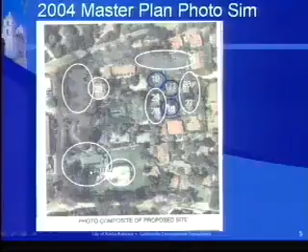And then we have a photo simulation of what the project would look like if the applicant went forward with the complete 2004 master plan. Of course, this is a photo simulation. This was an enlarged parking area to look like this, enlarged here in the northwest corner. These blue ones, again, are the historic buildings that have actually been moved, relocated from here over to this area. And then the 5 new buildings that were approved: 28, 27, 26, 25, and 29. And then the main building, some changes were approved there, and as well to the pool.

As you know, this is a 6.7 acre site. It consists of 29 buildings. And since the 2004 master plan, some changes were made. Basically this is what consists of those changes.

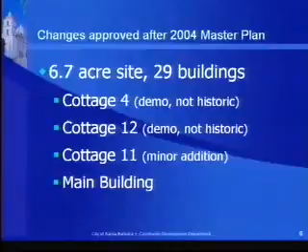Cottage 4 was requested to be demolished because there were structural problems. It was not one of the historic buildings, and it went through the process of HLC review and a historic structures report, and that was approved. Same with Cottage 12, which was allowed to be demolished and reconstructed, and also not a historic building. Cottage 11 was allowed to have a minor addition in the back due to some structural problems, and that was approved. And then some other changes to the main building that I'll go through.

In regard to the main building, the 2004 master plan included a new entry, new loading dock area, raising the lower level of the dining deck, and an expansion of the hotel consisting of 2,251 square feet, which would include a new spa, fitness center, and administrative offices within that square footage.

The applicant presented information regarding the structural problems associated with the main building when they began looking at making those changes. They requested a demolition permit and went forward doing that.

Some of the changes as a result of the new building being constructed are listed here. There was an increase in the basement size of 953 square feet, an increase in height of 2 feet. There's also some concern that the main building was increased in height by maybe 8 feet.

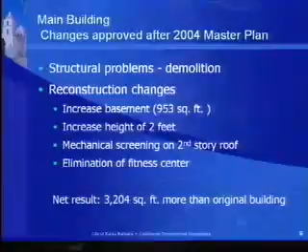I think what people may be looking at is that there's some mechanical screening that was approved on the second story roof, and that does extend the second story. I'm not sure how many feet exactly, but to screen that mechanical equipment. And then also the elimination of the fitness center that was approved on the first floor of the main building.

The net result is that there are 3,204 square feet in the main building, more than were in the original building.

Now getting to the revised master plan, it basically consists of 5 components: the northwest corner, the northeast corner, cottages 27 and 28, the swimming pool and fitness center, and then a small portion by the entry and service area of the main building.

The approval consisted of the relocation of those historic cottages and the construction of a new surface valet parking lot consisting of 52 spaces. Today's proposal consists of a utility distribution facility, a surface valet parking lot with 43 spaces, and an underground operations facility.

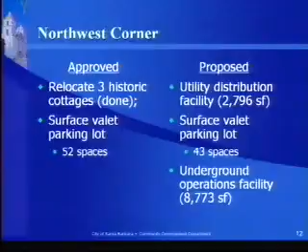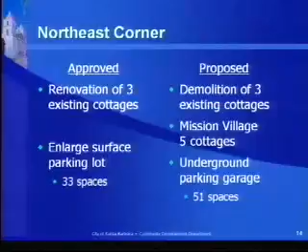In the northeast corner, over here, the approval consisted of the renovation of those 3 existing cottages and the enlargement of the surface parking lot to have 33 spaces. The proposal today includes the demolition of the existing cottages, the construction of 5 new cottages called the Mission Village area, and an underground parking garage consisting of 51 spaces.

In the 2004 approval, cottages 27 and 28 were included. They were eliminated after that with the transfer of that associated square footage to the basement of the main building. As part of this project, the 2 new cottages, which are substantially what they were before, are being asked to be approved.

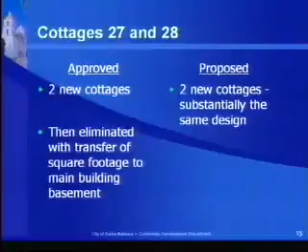In the swimming pool and fitness center area, the original approval was for a remodel of the pool and deck, with a new fitness center proposed in the main building. The proposal now is to relocate the pool further to the east and move the fitness center underneath the pool and deck, totaling 2,775 square feet.

There was a new loading dock and service entry approved at the main building area. As part of this project, there's a proposal to widen the driveway somewhat, a new trash enclosure, screening gate, retaining wall, and also the relocation of 4 of the parking spaces in that area.

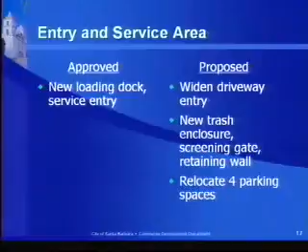The proposed revised master plan also has no increase in the number of guest rooms, no increase in the number of employees, although there is an increase in the number of parking spaces from 97 to 100.

In regard to design review, the 2004 master plan and the subsequent approvals I mentioned were required to go before HLC for all design approvals, preliminary and final. Each building or group of buildings was required to be evaluated in a historic structures and sites report. The HLC conducted numerous reviews as required and granted final approvals for all those projects, accepting each historic structures and sites report.

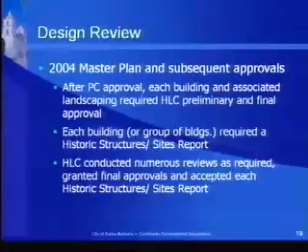For the proposed revised master plan, the HLC accepted a historic structures sites report that evaluated the revised master plan in relation to the entire site and all previous approvals. In addition, the HLC provided positive comments on the design of the revised master plan, and I've included a number of the HLC minutes in your staff report - not every single meeting, but the most relevant ones.

In regard to environmental review, a draft initial study and mitigated negative declaration was prepared. A public review period was held from December to January 15th, 2009. We had a hearing on January 8th to accept comments on the draft mitigated negative declaration. We've received 8 comment letters, which are also included in your staff report, and staff has responded to those comments, which are also attached to the environmental document.

Potential environmental impacts are considered in relation to an environmental baseline that includes the existing physical environment, the development approved in 2004, and the approvals that followed. The final mitigated negative declaration considers cumulative impacts of the revised master plan in combination with those previous approvals.

In regard to adequacy of review, an EIR is required when substantial evidence is presented that a project could potentially result in significant environmental impacts. The adequacy of the environmental document is determined by what is reasonable, and CEQA does not require a lead agency to conduct every test or study that could be brought to our attention. For this project, no substantial evidence has been presented that there is a potential for the project, as mitigated, to result in project-specific or cumulative impacts exceeding the significant thresholds accepted by the city. Therefore, a mitigated negative declaration is the appropriate environmental document.

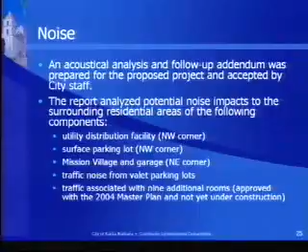It included the utility distribution facility in the northwest corner, the surface parking lot in the northwest corner, the Mission Village and underground garage in the northeast corner, traffic noise from the valet parking lots, and traffic associated with the 9 additional rooms that were approved previously but are not yet under construction. The report concluded that the operational noise levels associated with the revised master plan would be well below the city's acceptable thresholds. Therefore, long-term noise impacts would be less than significant.

In regard to historic resources, an addendum to the Historic Structures Sites Report was prepared that evaluated all components of the revised master plan, including landscaping, in relation to the entire site and neighboring sites, and was accepted by the HLC.

In that report, it identified a group of 5 eucalyptus trees located along Alvarado Place in the northwest corner. These were determined to be historically significant, not as individual trees themselves, but as a group. The report stated that the removal of the trees, for reasons other than health and safety concerns, would constitute a significant impact to historic resources.

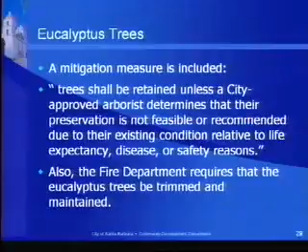This is the report that the HLC approved, and we put together a mitigation measure. I've provided an excerpt here from that: trees shall be retained unless a city-approved arborist determines that their preservation is not feasible or recommended due to their existing condition relative to life expectancy, disease, or safety reasons. Also, the fire department has looked at this and is requiring that all eucalyptus trees be trimmed and maintained for fire safety.

In regard to aesthetics, the determination was made that the project would not substantially negatively impact the aesthetics of the site or public and community views.

I'd like to go over briefly the square footage amounts and how we get to the number we have today. Previously, 3 parcels were merged, and from that, the project site qualified for 3,000 square feet per parcel. They qualified for the vacant parcel square footage and a demolition credit for a laundry building that had burned down. Here are the numbers for each of those.

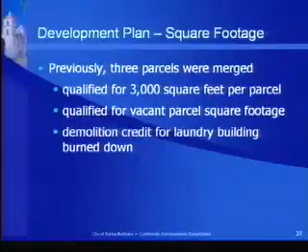In 2004, the master plan included 8,010 square feet, so that's been subtracted out. We made an adjustment in regard to the cottages of 2728, and we can go into that if you'd like. That adds another 883 back into the amount that's available. So the site currently has 7,021 square feet of available non-residential square footage. The project, though, would require 17,021. Therefore, the applicant has requested approval of a transfer of existing development rights for the remaining 10,000 square feet.

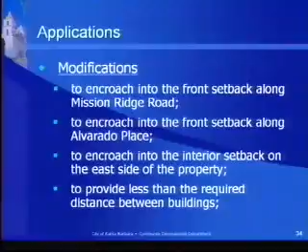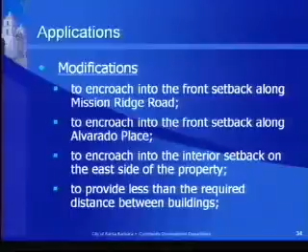The project includes a number of modifications, and other applications are required. Modifications that I'm not going to go through specifically, but they are to encroach into the front yard setback along Mission Ridge Road and Alvarado Place, encroachments into the interior setback along the eastern property line, and a modification to allow less than the required distance between the new buildings.

For any development in the RH zone, a development plan approval is required. Also, development plan approval is required to allocate that 7,021 square feet of non-residential square footage, and a transfer of existing development rights for the 10,000 square feet being requested.

Staff is in support of the proposed project, including the modifications, and recommends that the Planning Commission adopt the mitigated negative declaration, approve the project, making the findings outlined in the staff report, and subject to the attached conditions of approval. That concludes the staff presentation. Thank you.

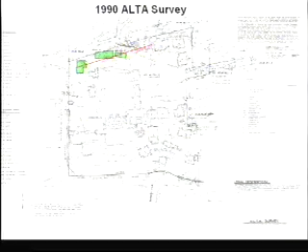Thank you. Now I have two things to manage up here. What I did is I superimposed the 30-foot setback to show you that there were hotel operational structures located in this portion of the property for a period of time, making the point that what we're proposing with the revised master plan, I feel, is very consistent with these land uses that previously existed.

I actually was made aware of this relatively recently. After the laundry structure was destroyed in a fire in 1998, the laundry facilities were relocated into Cottage 19 and operated there for a number of years.

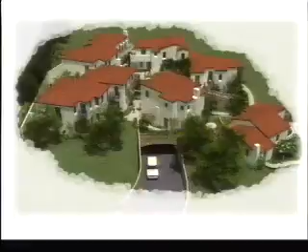And I just want to show you, we've been working on modeling the proposed Mission Village area. Thank you. We had these up at the site visit this week.

Here's the entry driveway coming into the parking podium structure with Mission Village proposed on top. Gives an idea of the different relationships and spatial relationships that we were working through the Historic Landmarks Commission.

This is a south-facing view. This is Cottage 30, the one-story structure that we had shown you with story poles this week. And you can see Mission Ridge Road shown right here. What's hard to capture in this view, maybe, but what we could see at the site is the topography, the pretty steep slope happening, the change in elevation from Mission Ridge Road down to the site where the proposed buildings are located, providing what I think of as a natural buffer between the street and the property.

I'm done with those visuals. Thanks, Danny. I want to move on to a little bit more explanation of the utility distribution facility.

In the 2004 approval, there was no utility distribution facility proposed. In fact, at the time, the project team and this owner presumed that they would be pursuing a traditional heating and cooling system, meaning installing individual pieces of mechanical equipment throughout the site. So the team came up with some ideas, went to Historic Landmarks Commission, and proposed exterior mechanical equipment, and they were turned away by the Historic Landmarks Commission. That approach and the traditional approach was found to be unacceptable, and the Historic Landmarks Commission directed the design team to explore alternatives to simply heat and cool the buildings on the property where they previously were not.

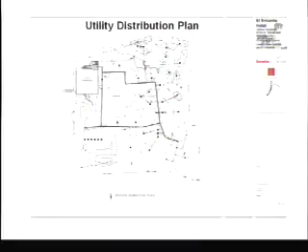This system distributes power, or energy, from a utility distribution facility located in one corner, with individual smaller pieces of mechanical equipment distributed across the site, hidden, concealed, and sound attenuated underneath the cottages themselves. So you're not seeing any physical change to the property to accommodate heating and cooling. Consider the system as a whole as 100% energy.

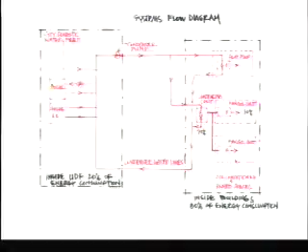This is the simplest diagram the team could produce, showing the utility distribution facility, the flow lines serving the property, and the individual cottages. What's compelling is that the utility distribution facility accounts for 20% of the energy consumption, the cottages themselves with their individual condensing units are 70%, and a fan coil unit in the attic space is another 10%. So the project does not put all the powerhouse, noise, and mechanical systems localized in one area of the property.

Instead, it distributes the system throughout so that each cottage can achieve greater sound attenuation. Let me go back to the site plan. I have sections and all the drawings in your plan set in the PowerPoint, but that would take too much time—we'll come back to any questions during Q&A.

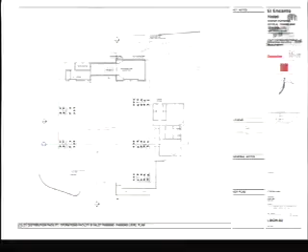This location facilitated this type of system because of the topography and the proximity of city infrastructure to tie into city utilities out in the street. The team was challenged to bury this mechanical equipment ranging from 17 to 22 feet below ground, which allows a lot of baffling and silencers. Some elements do come above grade simply for air ventilation, so this facility has allowed a lot of flexibility with the individual cottages.

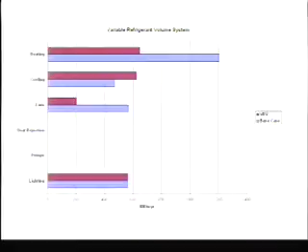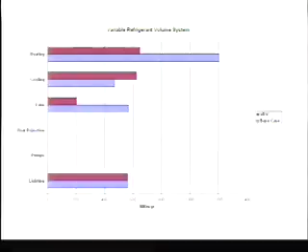I wanted to show this quick study, which was part of a selling point to the owner for this system. The systems within the cottages are called VRVs, shown in maroon, compared to a traditional air cooling and heating system. You can see how much better this water condense system performs in heating and cooling than a traditional air cooling system.

We'll have more questions about that, so I'll move on. I wanted to touch on the TEDR briefly—staff went over site development potential, and some questions were raised at the site visit about transfer of floor area, where our project requests 10,000 square feet to be transferred to the site. The site itself had just over 7,000 square feet of its own site development potential. So where is the 10,000 square feet needed?

Honestly, in the main building, the previous approval did not accommodate sufficient hotel operational areas—physical areas needed to operate this type of 5-star resort hotel. To meet this owner's needs and provide the guest amenities people expect today, there are needs for storage space and other facilities that are simply hotel operational support needs.

So that 10,000 square feet—if we look at the breakdown, I was playing with the numbers because the operations facility, back of house... hope you're within about a minute, as am I.

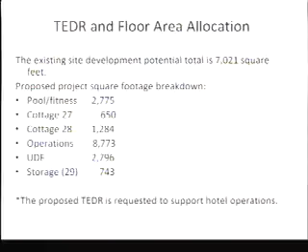So really, this transfer is to support the function of the hotel, and the way in which we felt it best, so it would not impact the site, the historic character of the site, or the neighborhood, is to put it underground. So it's a needed amenity. It doesn't impact mass, bulk, and scale or density on the site or historic resources.

And as staff already stated, this does not result in an increase of employees. We're not adding floor area needed for guest rooms and things like that, but just simply needed storage space. Now, I know you have a lot of questions.

We'll get to those. I wanted to mention that I'm aware of a lot of folks that wanted to come out today and make public comment beyond who are here in the room. I knew that a lot of folks weren't able to be here and did submit quite a few letters. I'm sure you've received them. I saw some of the emails and letters of support as well. So I just wanted to make note of that. And we are here to answer your questions. Thank you. Thank you very much.

With that, I'll open public comment. I'd like to start. There are two members from HLC here. So we'll have Don Sharp followed by Fermina Murray, please.

Thank you. I'm Don Sharp, Vice Chair of HLC. This project has been going on for at least 5 years, and the master plan was approved in 2004 when I was between two-year terms of being on the Landmarks Commission. So I was not personally a part of the original approval, and came back on HLC and have been dealing with the fragmentation that we have been seeing through this entire process.

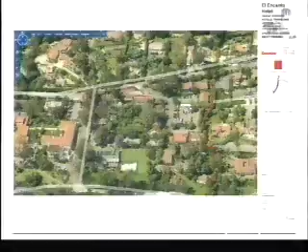Okay, we'll have Ms. Lodge next, and then Mr. Justice. Madam Chair, are we still asking questions? Oh, I'm sorry, oh wait a second. Do you mind if I have Mr. Thompson go next because he hasn't spoken yet? Yes, that's fine. Thank you. I already asked my questions. Oh okay, thank you, okay thank you. You're ready for comments. Mr. Thompson, please, questions? Thank you, Madam Chair.

I have simply one question for staff. We're asked to make about 7 discretionary decisions here, and the issue of most interest today has been the first 2 modifications about the utility distribution in the northwest corner. We're required to make findings that this encroachment is necessary to secure an appropriate improvement, and the necessary part is where I have a question. I see nothing in the record here to tell me that it's impossible to have the utility distribution portions occur above ground outside of the setback. In other words, we've got a big geographic area there with a large underground basement structure, and some of it has to occur above ground for the exhaust and so forth. But I didn't see anything in the record that showed that no other location not in the setback was possible. So to make a finding that this location is necessary, I would think we might need that kind of information. I just wondered if you could point me to it or somebody could explain it.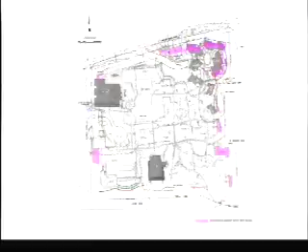Mr. White. Thank you, Madam Chair. I wanted to comment on the parking lot. I think that for me, there's strong credence to the fact that it is an approved parking lot as is, and it's better now being cut down lower into the grade than it was before. So that's the reason that I can support it, is that it's been approved already.

Mr. Bartlett. Thank you, Madam Chair. Well, I think this commission has already had other projects recently before it. I'm thinking of the 15 South Hope, where we had the subterranean parking garage encroaching into the front setback area below grade. So I think that the new structure under this parking lot encroaching, as long as it's covered with dirt and not visible to anybody, would be supportable in that same light. And if they're willing to move the above grade component, I think that's a great gesture, and we already have a parking lot, a much bigger parking lot, approved in this exact location. So I think that's a reasonable compromise, at least from my standpoint, and I do think the lowered grade on the lot is beneficial to the neighbors. So that would be my point of view.